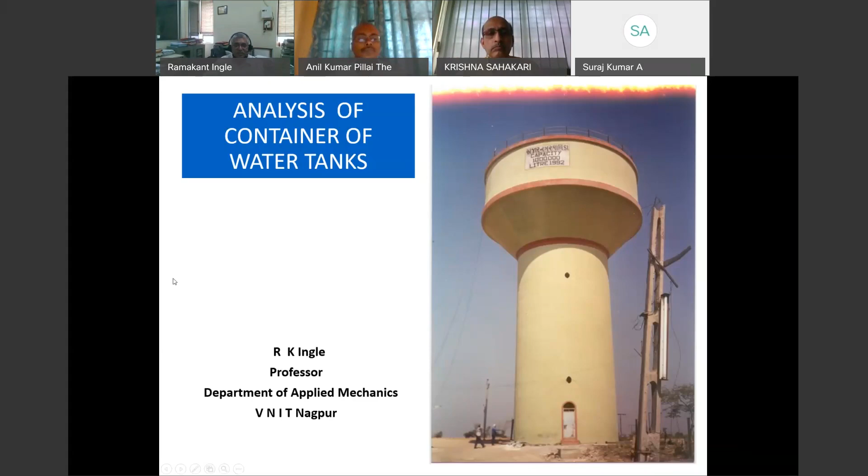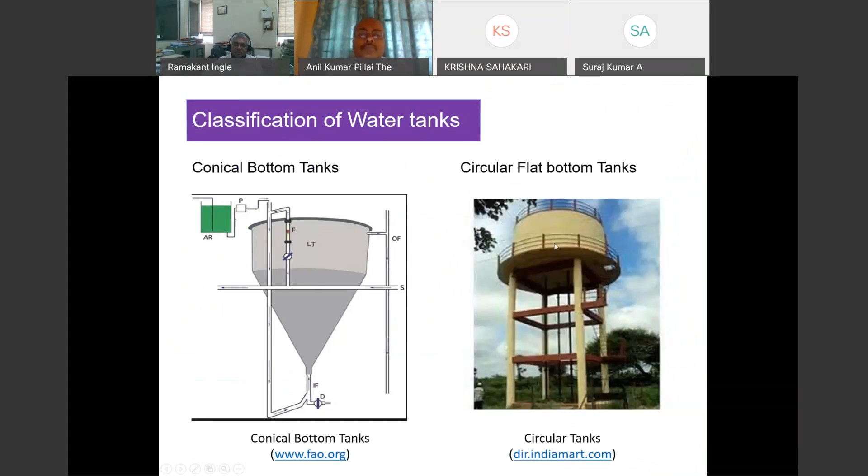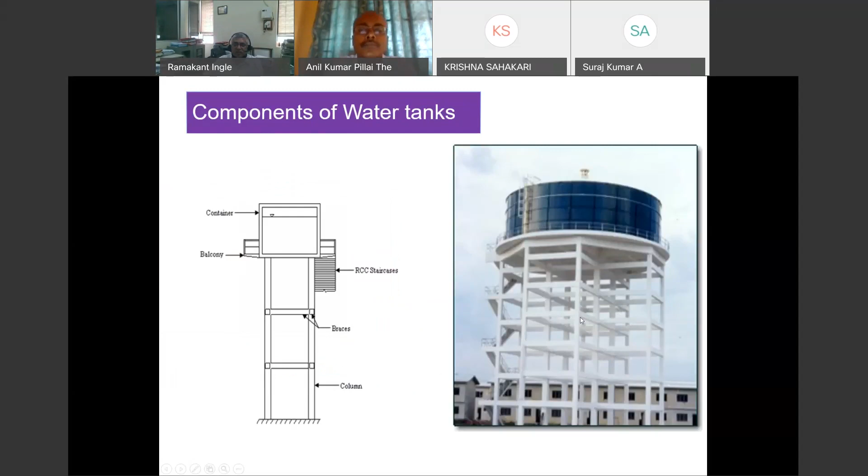First of all, analysis of container. We can have many types of container, like circular, which is underground, which is overhead. Then we can have rectangular, spherical bottom tanks. We can have conical tanks. We can have flat circular tanks. In Maharashtra, such type of tanks are very popular. And Intz tanks, which are quite popular especially in North India. In Maharashtra these are not very popular because their staging cost itself will be much higher compared to the other cost. These are the tanks which are popular in India, in Maharashtra. It is basically columns and braces. I will be discussing analysis of this tomorrow.

Basically, liquid retaining tanks can be underground, on ground or elevated. Based on shape, they can be either rectangular, spherical bottom, conical bottom, circular tanks, Intz tanks. And based on material, water tanks can be of steel, they can be nowadays ready-made, then reinforced concrete and composite tanks. Composite means the staging will be of concrete, and then a ready-made tank is placed at the top of it, which is also quite popular nowadays in villages.

Now, method of analysis. Basically, these are the 4 methods which are commonly used in analysis of container of water tanks. One is membrane analysis, continuity analysis, then IS code method. IS code has given some coefficients, and if we use those coefficients with certain boundary conditions, that I am calling the IS code method. And then more general is finite element method.

Tomorrow, day after tomorrow, Dr. Virendra Dehadra will be discussing, we have developed one frame analysis method for water tanks, which is just equivalent to finite element method and which is much faster. I recommend most of the time that particular method for water tanks. I will be discussing all this one step by step.

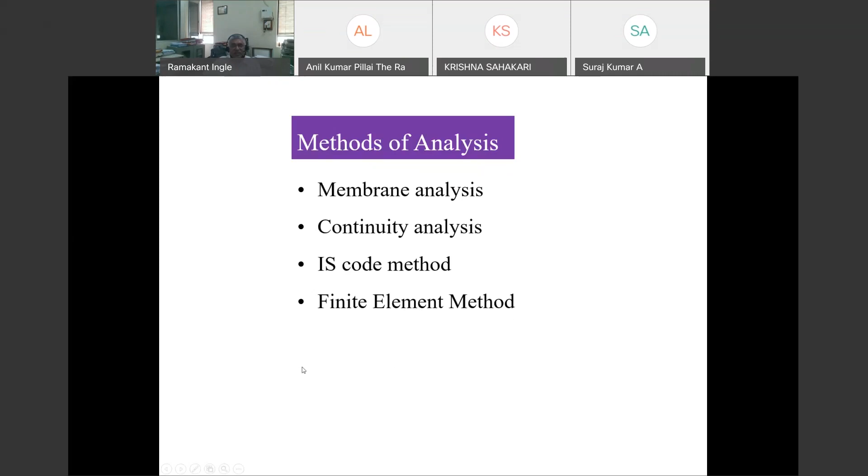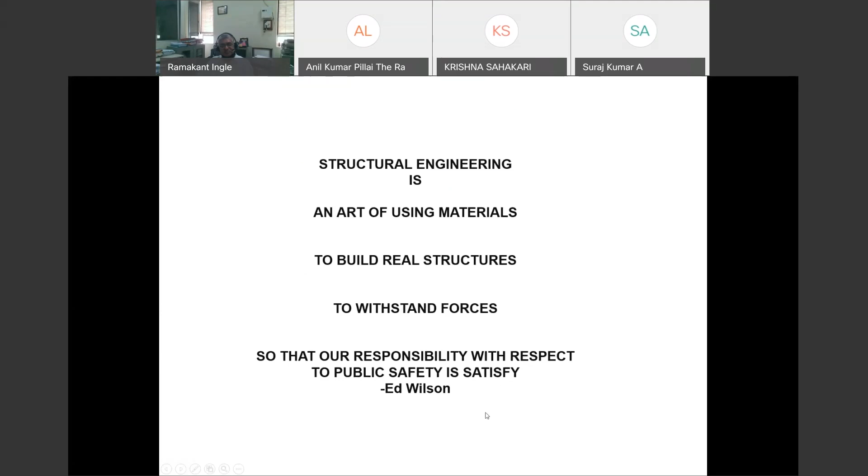This is one statement which I liked. I have taken this from Dr. E.L. Wilson's book, the author of SAP 2000. What he mentioned: structural engineering is an art of using materials to build real structures to withstand forces so that our responsibility with respect to public safety is satisfied. Now you can see the hidden things in this - an art of using materials that have properties which can only be estimated.

To build a real structure that can only be approximately analyzed. Apart from simple structures like a cantilever or simply supported beam, we cannot solve any structure exactly. Whatever software you are using, none of the structures can be solved exactly. It is only approximate with certain assumptions, like I was talking about grade of concrete. We cannot have the same grade of concrete for all the elements of an ESR, but still we are assuming it is only one and we are going with that analysis.

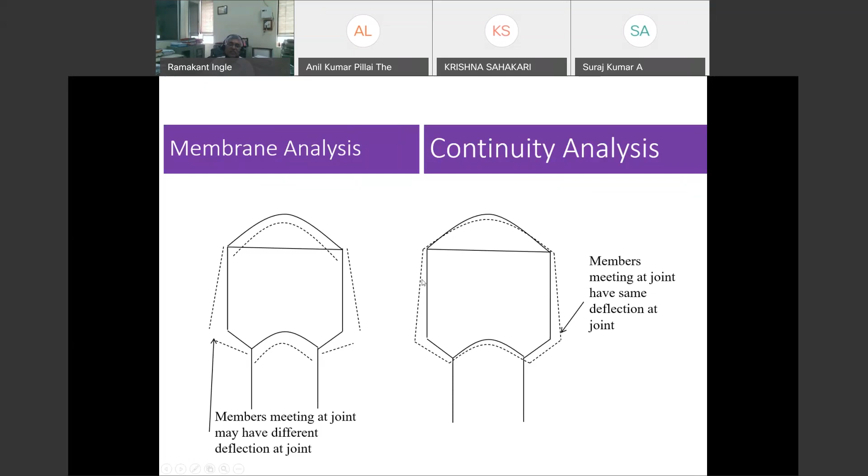We can solve this particular problem of a container by simply assuming a container wall which deforms like this, A to C.

This total displacement will be WH R square by ET. Suppose there is no connection at this point.

Now to have connection at this point, we can bring this particular point here. We can write a differential equation for this particular structure.

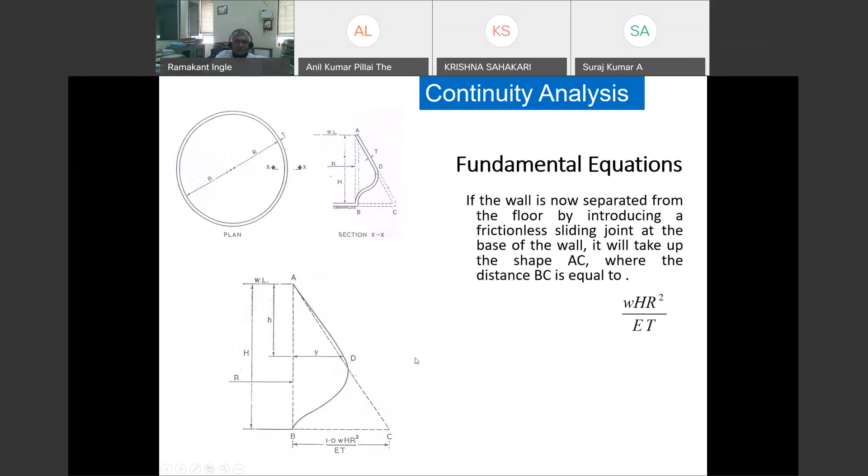Once we calculate the A, B, C, D constants, we can get all the values: deflection, slope, moment, and shear at any point H from the top.

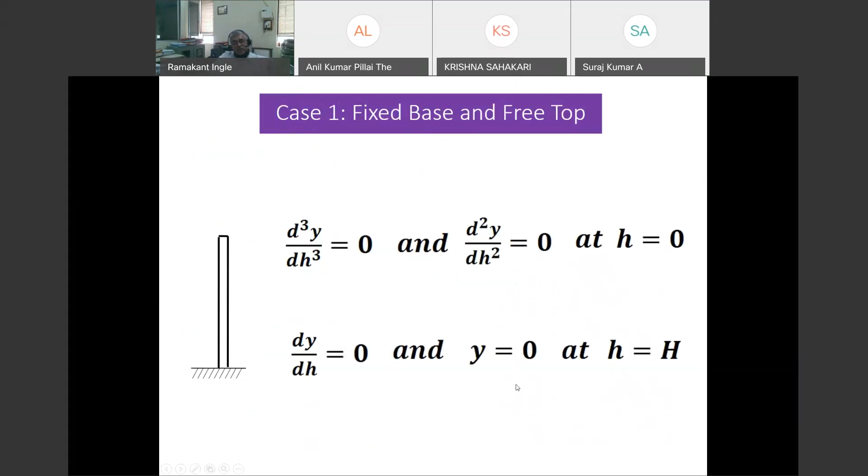Now this A, B, C, D calculation is based on boundary conditions like fixed base, free at the top. We can apply these boundary conditions and solve for A and B, and we get the hoop solution like this.

This is our hoop solution. You can see it has been cross-checked with so many software as well as IS 3370, because this is a standard case: fixed at the bottom, free at the top.

Again, I would like to mention that whatever tables are given in IS 3370, these are exactly same as given.

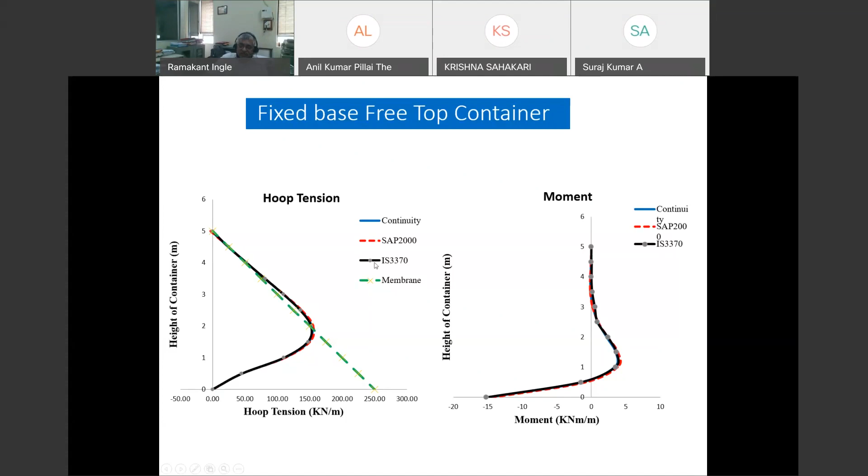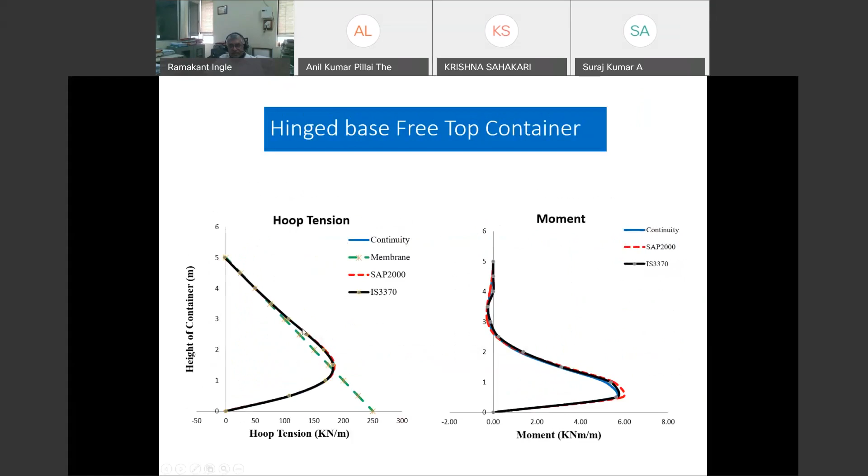Once we have got that differential equation, we can solve for hinge base, free at the top. You can see these are the moment diagrams. This is hoop tension and moment diagram for that. Now I will be just browsing through many cases.

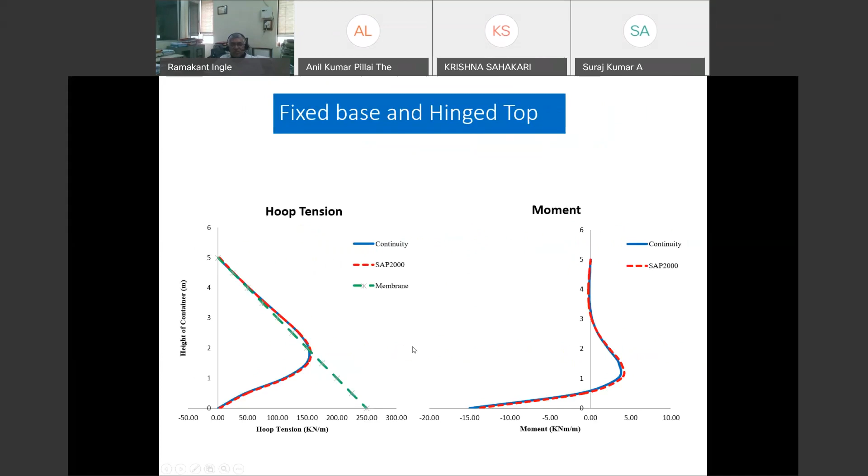There are many cases which are not given in IS 3370, but we try to solve them. Fix at the base, hinge at the top. This is the hoop tension, and this is the moment diagram for that.

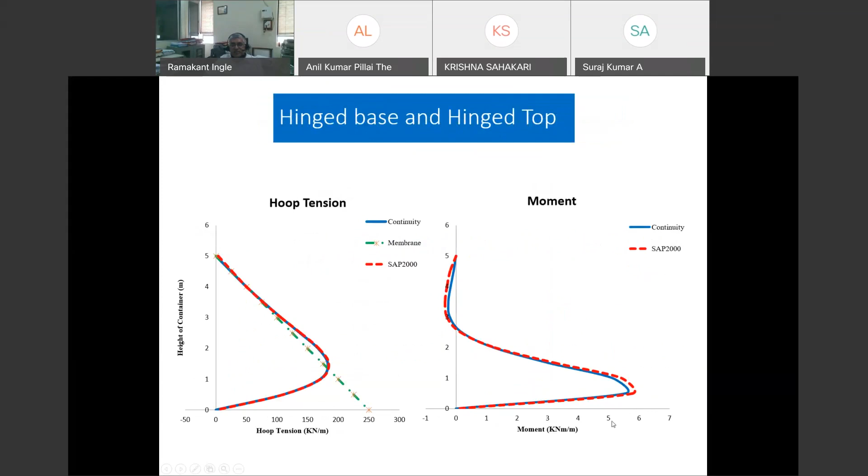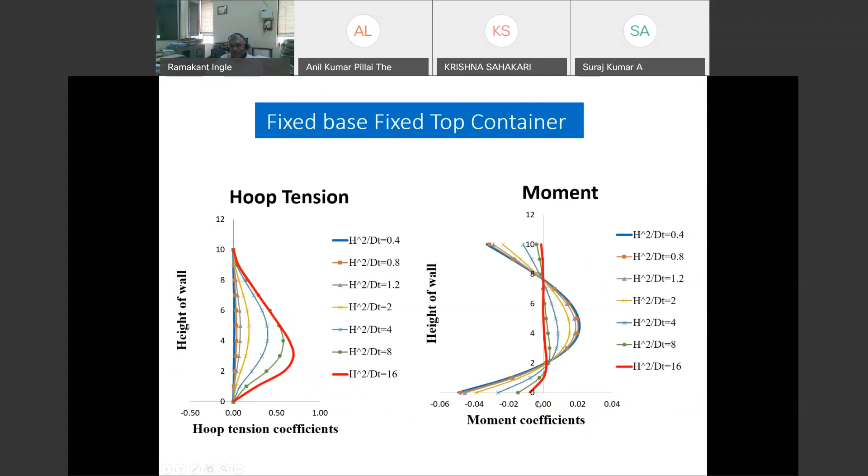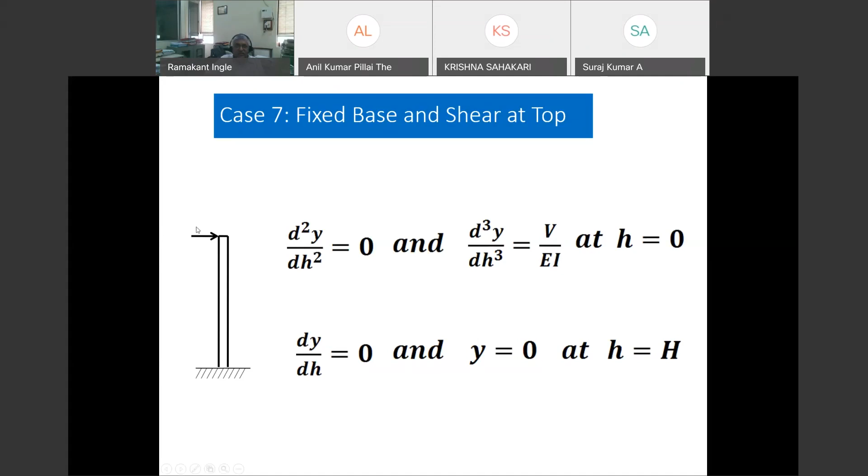Now why shear at the top? You can see we are having slab at the top. Most of the times what happens, this slab is either resting on this particular wall or it is attached to the wall. Now, because of temperature, there will be contraction and expansion of this particular slab, which may induce horizontal shear at that particular point. So this case is for that particular condition. You can see we get moment at the top.

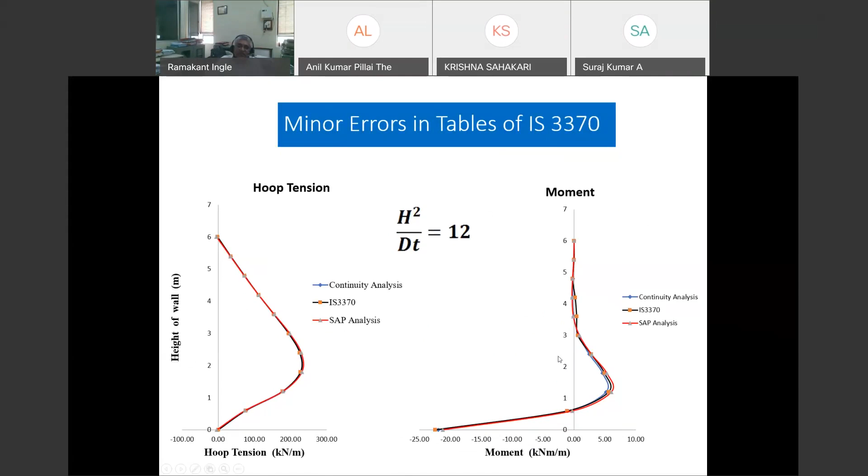Now, I would like to mention here, why so many cases? Fix at the bottom, hinge at the top; fix at the top, hinge at the bottom; free at the top. See what happened, we are having this particular slab. Now, before going to explain this methodology, I would like to discuss.

Let's take a simple plane frame, two columns and a beam connecting at the top, fix at the bottom. Can we take that particular beam as fixed in between columns? No, because it depends on the stiffness of columns. Now, as we increase the stiffness of the column, let's make columns very big. You will find that the beam starts behaving like it's fixed between the columns. If you try to have slender columns, you will see that our moment approaches WL square by 8, which is the simply supported case.

Same thing happens here also. Ideally, I would like to say that fix at the bottom is a very approximate boundary condition. Now you can see many times what happens, we have got 200 wall thickness and we have got 200 slab thickness. We cannot say that this 200 slab thickness, resting on soil, will give complete fixity to this particular wall. So it will not be exactly fixed at the bottom. Even at the top also, most of the times our top reinforcement goes into the slab, so it cannot be free at the top.

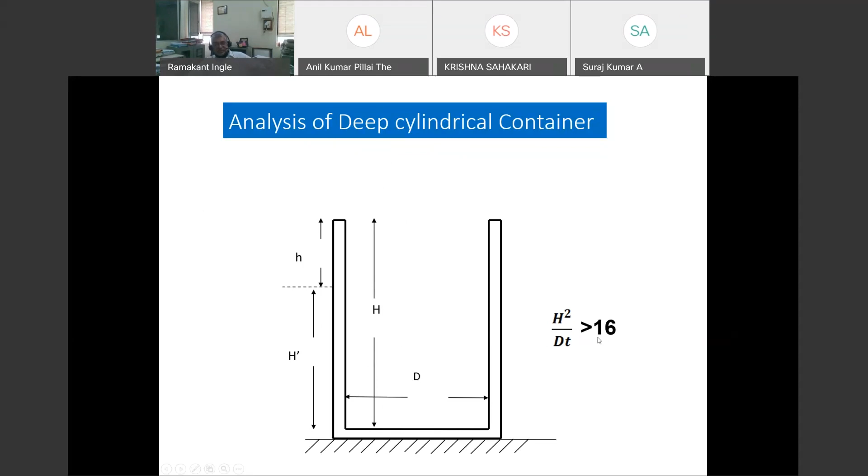Now, coming to deep cylinders, what happens? Our H square by Dt ratio is given up to 16. So we can calculate, based on that H square by Dt ratio, the H here. Now, the above part we can design as a membrane, and the below part we can design considering the H square by Dt ratio coefficients given for H square by Dt ratio of 16. And we can solve the deep cylinders also.

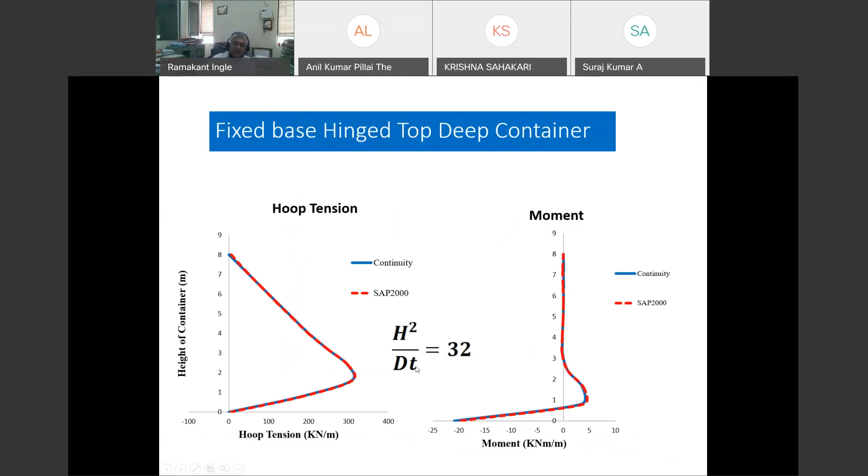Or we have given in our booklet H square by Dt ratio values of 32, 64, 40, so many values, and these values are also available in the PCA handbook, which can be referred.

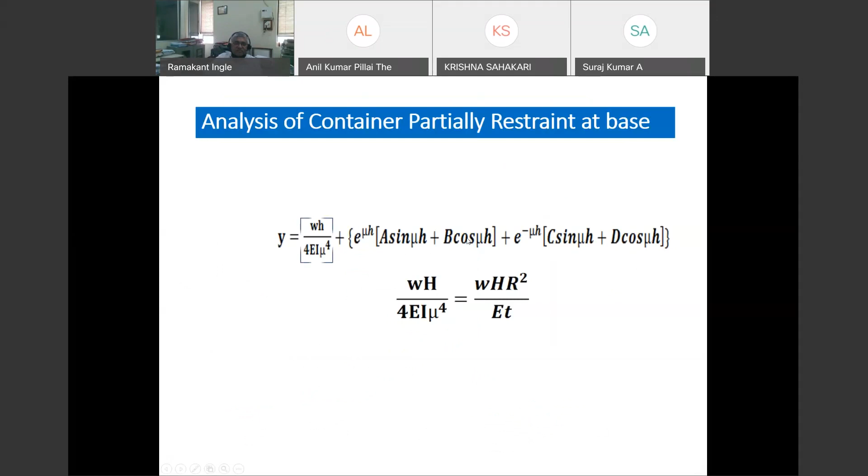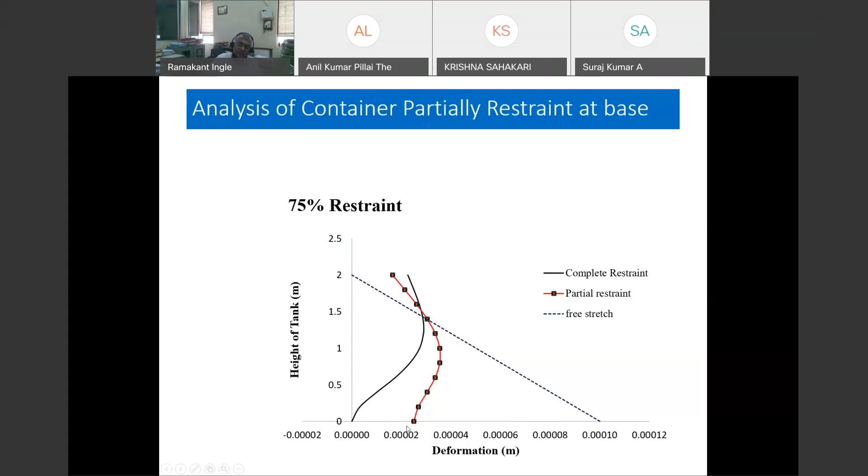Now what happens because of that? There will be a change in hoop tension. You can see our hoop tension changes. You can see this is our hoop tension.

Most of the times what happens, many designers put hoop tension still at this particular location, bottom some part and top some part, given as almost minimum hoop tension. Now you can see, suppose there is a partial restraint at the bottom, our hoop tension increases at the bottom. Even moment also, there will be variation in moment. So we have to keep in mind all these factors while using any ready-made table for design of a container.

Okay, we can see how our moment and hoop tension diagram varies based on the restraint provided. If we are providing, let's say 150 or 200 thick wall, we cannot guarantee that it will behave like a fixed support, there will be some release in restraint. So while designing, we should keep all these points in mind.

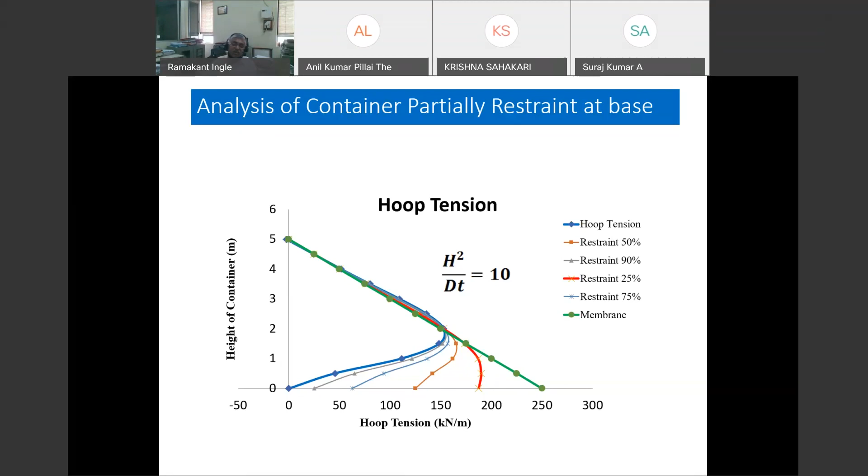You can see how moment also varies based on the restraint. Now this is again restraint at the bottom. This is restraint at the top and bottom. This is restraint at the bottom only, and this is free. This is for H by root TR is equal to 2.

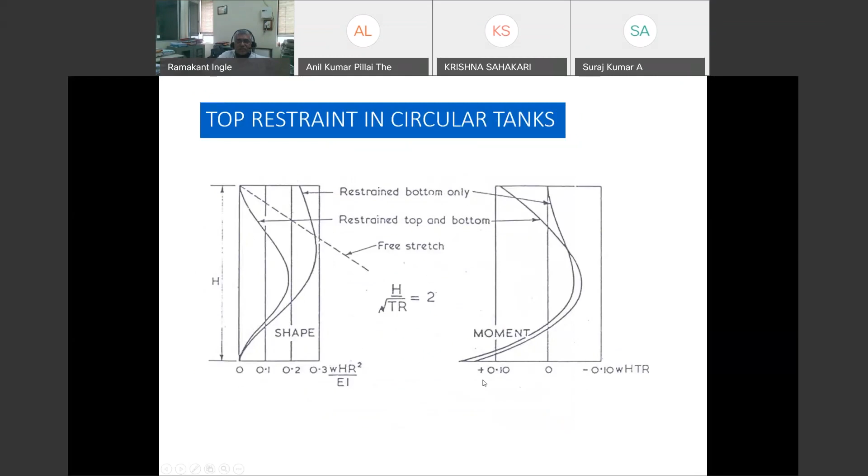Then this is again one more graph. Restraint at top as well as the bottom, and restraint at bottom only. This is just to explain how it varies. There will be considerable difference based on the restraint.

Now you can see here restraint at the top and bottom. If we want to have restraint at the top also, we have to provide proper reinforcement at the top also. This will give our full fixity at the top also, like at the bottom.

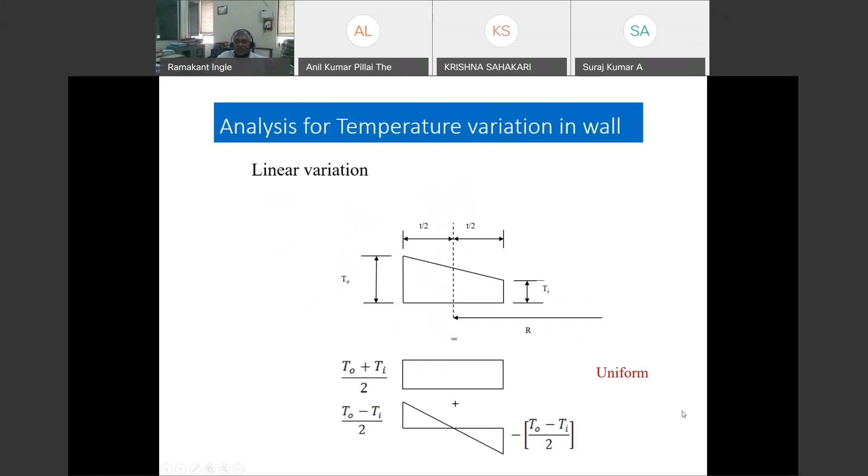Now, day before yesterday, Dr. Jain was talking about temperature variation. Even we can take temperature variation also. I have not seen any designer considering temperature variation, but it matters a lot. We can have uniform temperature as well as gradient.

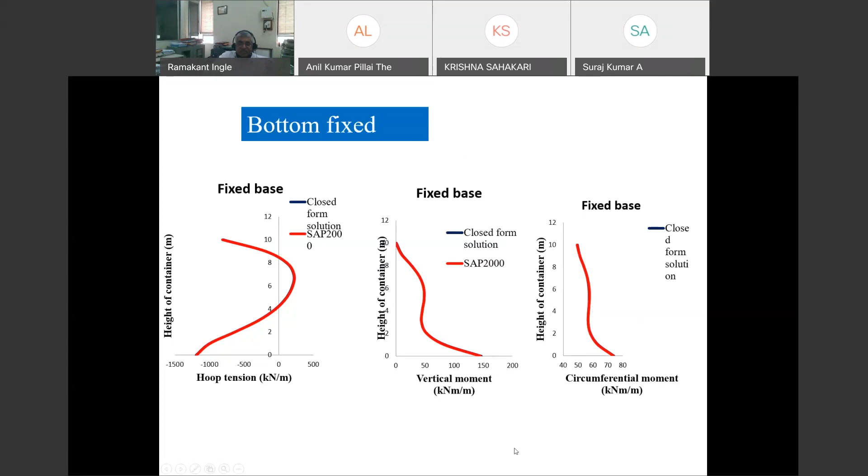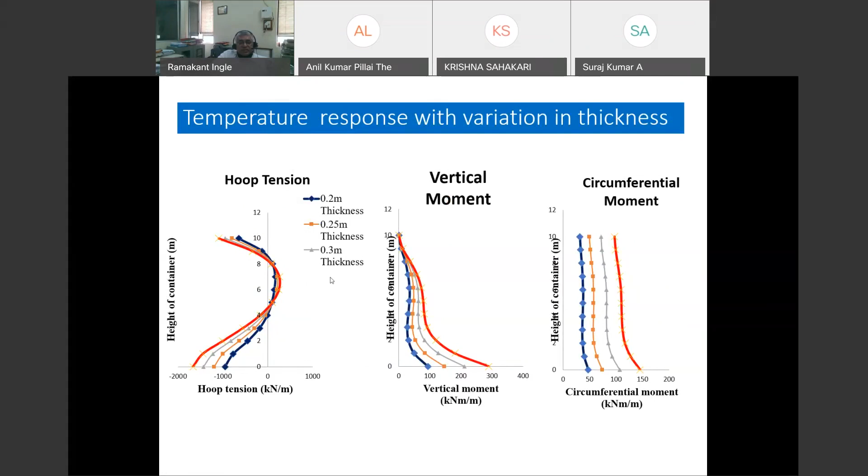Now this is our temperature variations due to thickness. More the thickness, more will be the response. You can see here.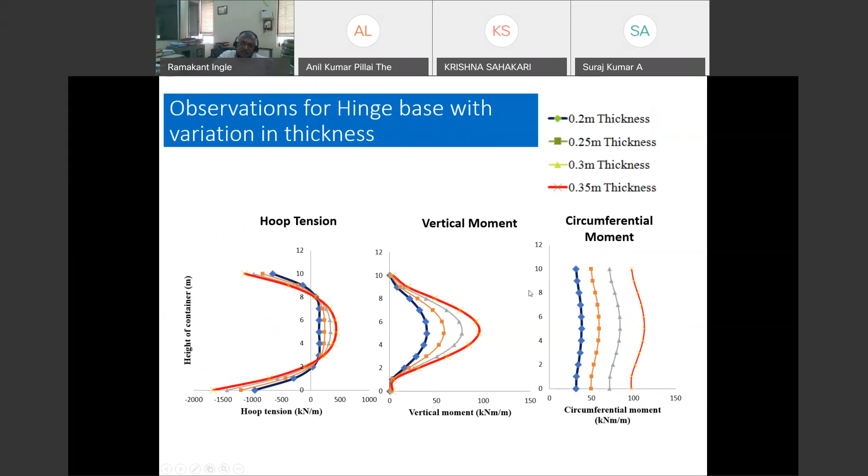Effect of diameter is not that seen considerably as compared to the variation in thickness. You can see here variation in thickness is much higher compared to variation in diameter of the tank, because of temperature.

This, it depends on boundary condition. Now this is hinge at the base. You can see here, your diameter change. Variation in temperature is considerable here in vertical moment.

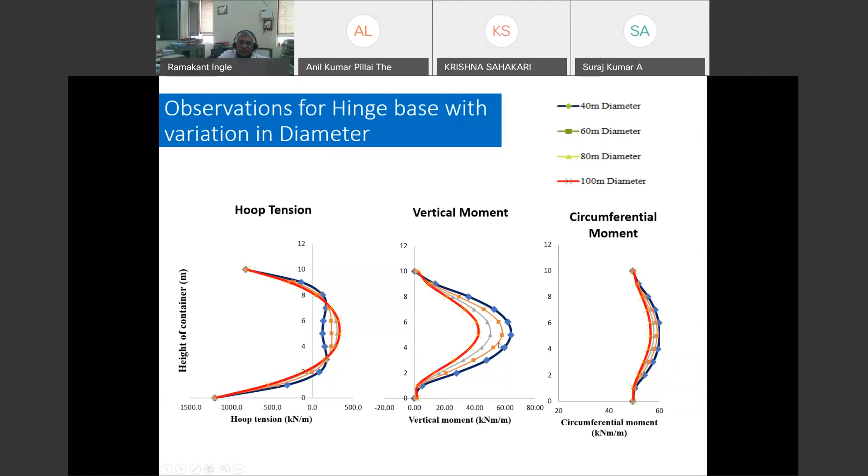Most of the times what happens, we are varying our thickness more at the bottom and top. We are reducing to whatever minimum requirement. There are no graphs given in IS 3370 or charts, or no methodology is given for variable thickness.

Now you can see this is also approximate. It is a thickness T at the bottom and 0 at the top. This particular is just to explain there is a variation between uniform thickness assumption and variable thickness. You can see here our value of hoop tension varies here depending on h square by dt ratio.

So we cannot say that, okay, take average thickness or take more thickness or take less thickness to find approximately the hoop tension or moment. That's why I'm coming back to that Dr. Wilson's slide. All our analysis is very, very approximate, and we have to pay penalty for that while placing the reinforcement. We have to be literally somehow liberal while providing the reinforcement, while providing the thickness. It is not that we can say that it is exactly provide only that much.

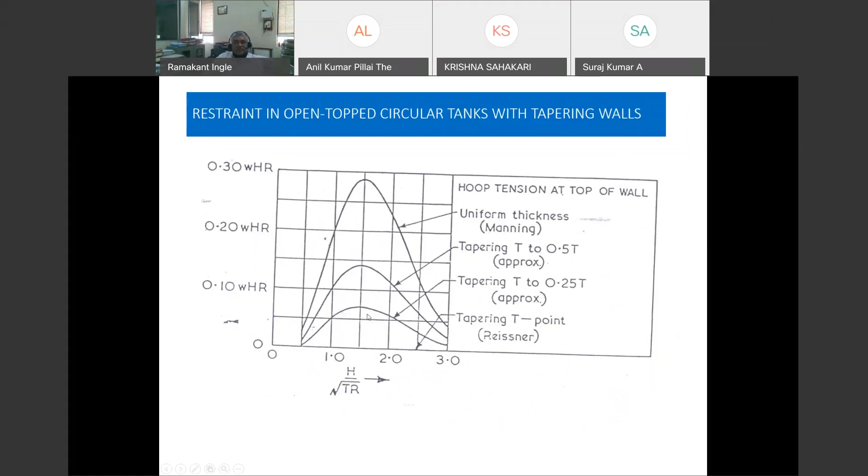So all this point we have to keep in mind. You can see the variation, how it varies. Tapering walls. You can see the variation in tapering walls. This is hoop tension at the top of wall.

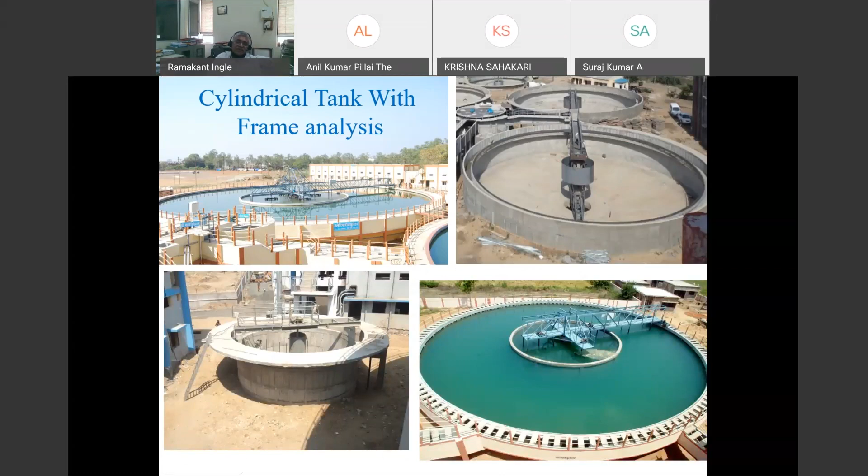Now this method of frame analysis which we have derived, it is based on the tank owing to circular nature. Its deformation we can relate with the similar analogy of soil structure interaction. This particular wall, we can say that it is resting on soil. Like this 1 meter length, circumferential length of wall we can take. This is our thickness. This particular thickness is thickness of this our launder or this cantilever slab, or it can be passage at the top.

You can see our moment as well as hoop tension varies based on this. These are the springs which are based on radius of this tank as well as thickness and E value of this particular concrete. You can see the FEM analysis as well as frame analysis results, they are quite matching exactly. This particular variation in moment is because of that launder slab at the base, which changes the moment diagram.

Now we don't have any chart, and we don't get any exact results unless we go for FEM. FEM is quite an involved procedure. We need good software for that and good experience also.

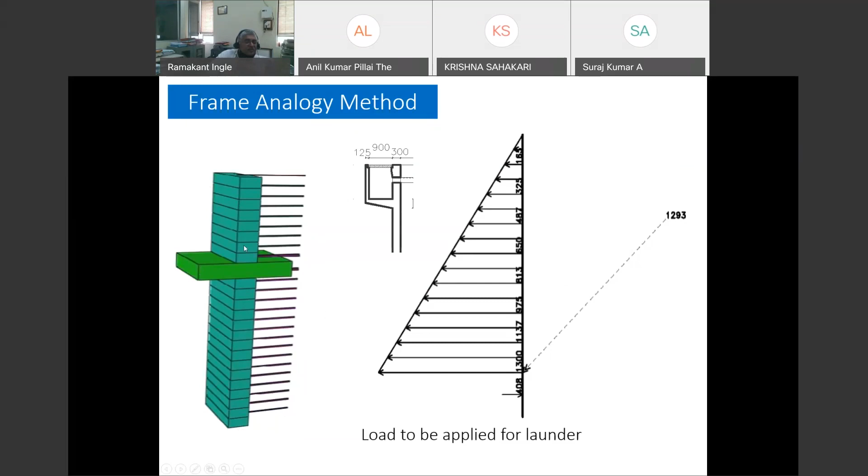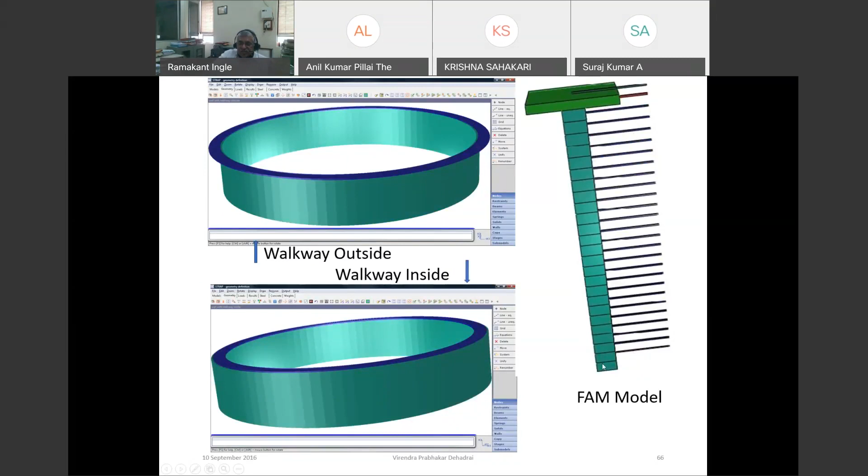And apply water pressure on this. Even we can have moment because of this particular slab also, and we can perform exact analysis using this analogy of beam on elastic foundation. You can see here top slab, these are the springs, this is the thickness of wall, and we can have our results ready.

It is just like a plane frame. We get moment, we get shear force, even we can get deflections also. See, nowhere we get deflection in our water tanks, there are no tables available. So here in frame analysis we can even get that also.

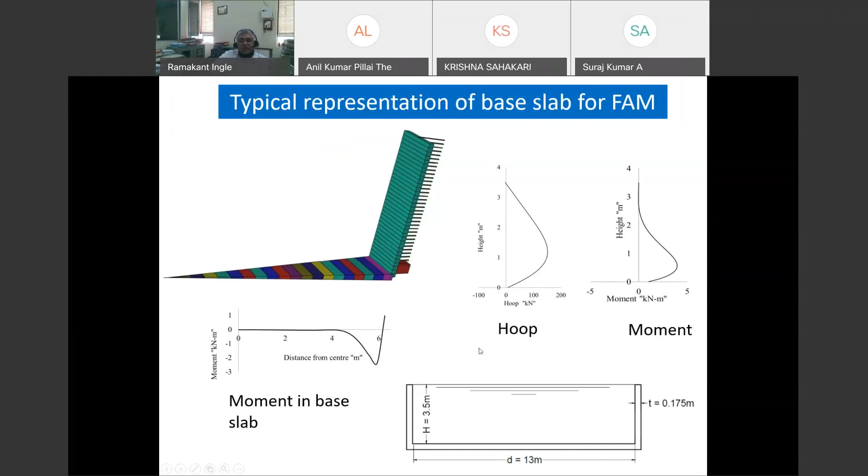You can see here, even we have done this for circular water tanks resting on soil. This soil can be hard, medium, or soft, and this is a water tank. We can solve using frame analogy method. This is the method which we have already solved, and we have cross-checked it with FEM. Again this is for h square by dt ratio 5.4 with TOW.

We have seen one advantage with TOW. There are certain advantages by going for extension of the TOW.

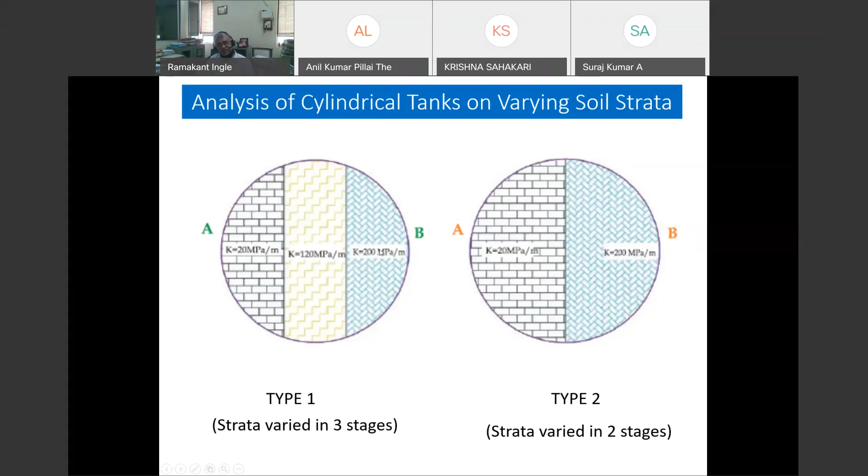Most of the times what happens, we try to use our IS 3370 coefficient tables to solve big water tanks also. Now in majority of water tanks, soil may not be exactly the same. Let's see here, soil is medium, soil is soft here, medium here, and hard here. And here soil is soft and medium. Our results will be different. We will not get the same results as axisymmetric structures, but there will be different results.

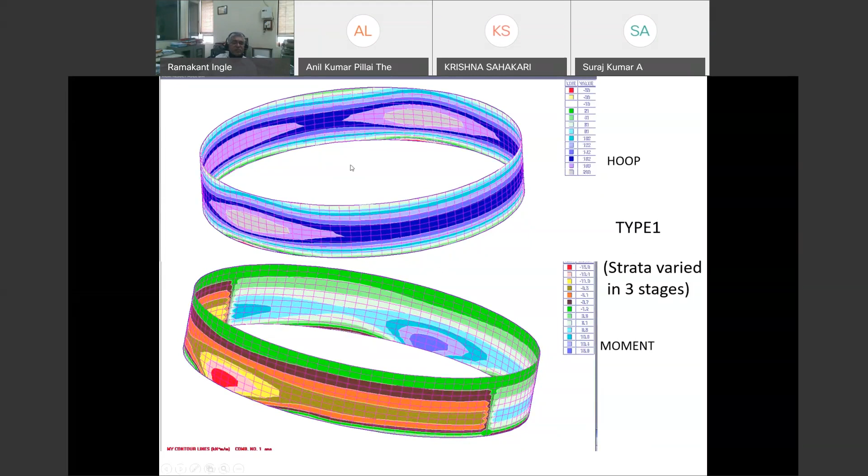So we have to give consideration to that also whenever we try to analyze bigger water tanks, big diameter water tanks, and all this can be very easily taken in frame analogy methods. Now I have discussed about circular water tanks. Now I would like to go for rectangular water tanks.

Again, rectangular water tanks, we have got an approximate method. There are many books which give some approximate formulas. Even we have got IS code also, given coefficients. We can use finite element method, we can use finite difference method also.

This is a tank. Now you can see IS method, it gives this particular wall with certain boundary conditions, and it gives for standard also some water tanks like this. In majority of cases, we have to do certain corrections at the boundary because our particular shape may not be the same as this particular wall, so we have to do certain corrections at this particular point.

Again, it is our assumption whether to take fix at the bottom or hinge at the bottom, or there will be restraint, partial restraint. It is a million dollar question, and only the designer has to design it properly with a certain more factor of safety, because it is very difficult to say whether it is fixed at this particular point or hinged at this particular point.

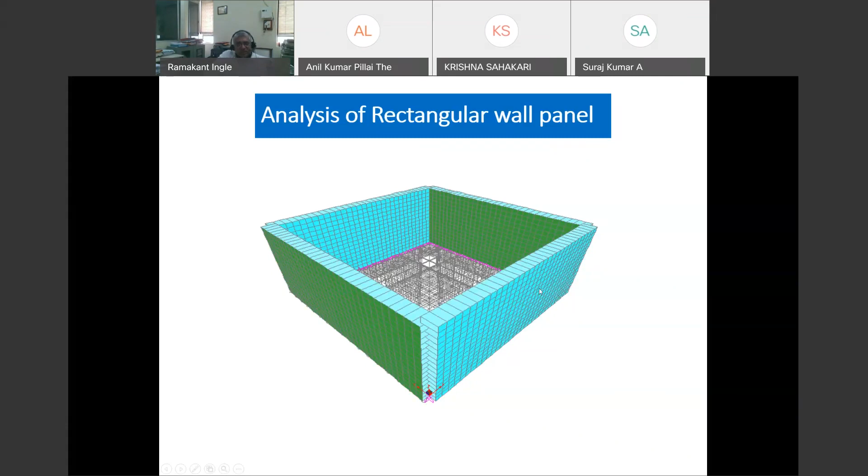So certain types of assumptions designers have to devise while using tables from IS 3370. So here also same thing is there, because such tables are given in IS 3370, even some other books also. At few points, moments are given, Mx as well as My.

Our study indicates that most of the times we get torsional moment also. We are designing only for Mx and My, that is vertical moment and horizontal moments, but at certain points there will be torsional moments also, which we get from FEM, but we are ignoring that. So even standard conditions are met, our results will be approximate.

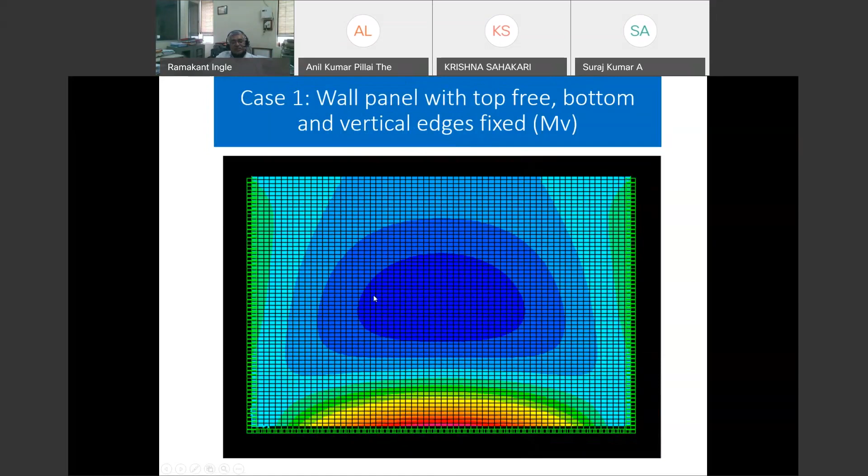You can see this is the FEM results which shows the vertical moment diagram. It is free at the top, edges fixed and bottom also fixed. It is subjected to water pressure, so this is the moment diagram.

Then top and bottom hinge, we have got different conditions for this - top and bottom hinge, and so on. These are a few observations. IS 3370 gives design table, but it doesn't give exact value of maximum moment. It doesn't give even deflections also, in case of rectangular water tanks. It will be approximate.

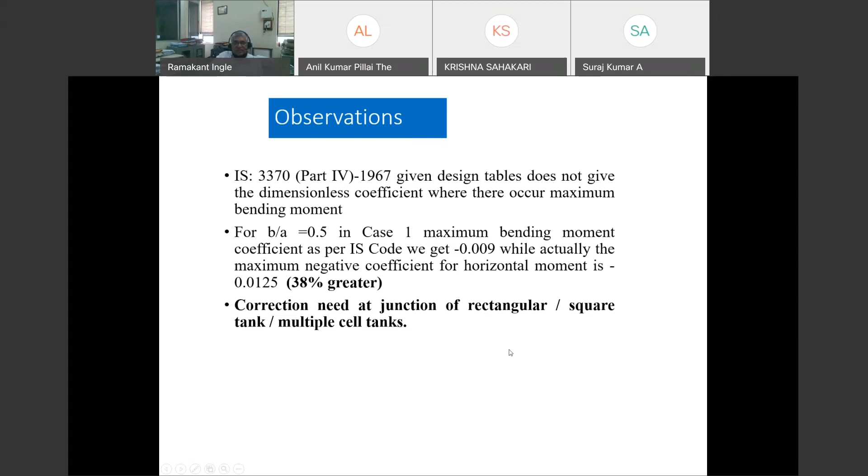Some corrections which I have already mentioned are required at junction of rectangular or square tanks, multiple tanks. We can use FEM for most rectangular tanks, and for circular water tanks, I suggest strongly we can go for frame analogy method, which is very, very simple. You have to just master it.

Any circular water tank with any boundary conditions, with any variation - it can be a trapezoidal water tank with thickness 200 at the top and maybe a different thickness at the bottom, or anywhere. You don't have any problem with that.

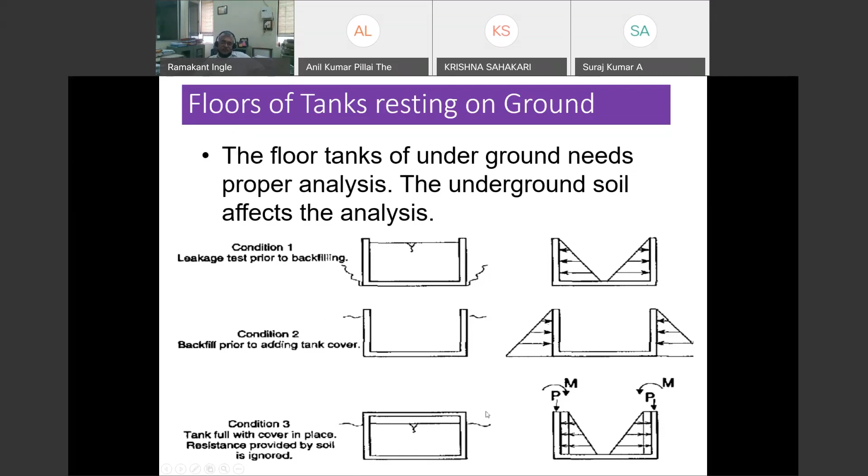These are some forces which we have to consider. Normally whenever a water tank is there, we have to consider without any soil from outside and with water inside, no water inside with soil outside, and no water inside with water table which can start lifting up the water tank. I have seen some water tanks lifted because of these conditions. So either they have to put concrete here or have dead storage permanently in the water tank to avoid flotation.

In case of earthquake, earthquake also causes some pressure on the walls - it is called hydrodynamic pressure. There will be suction on one side and pressure on the other. So we have to design for this, but we don't have any coefficient for such type of design - only FEM or frame analogy methods we can use for analysis.

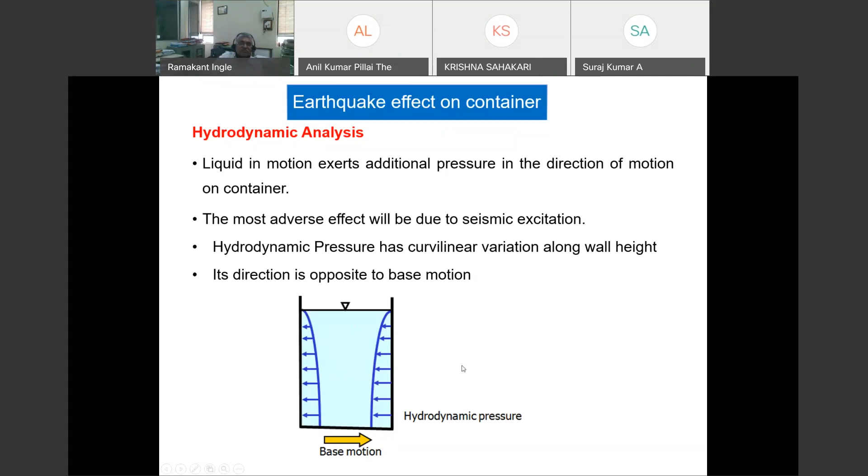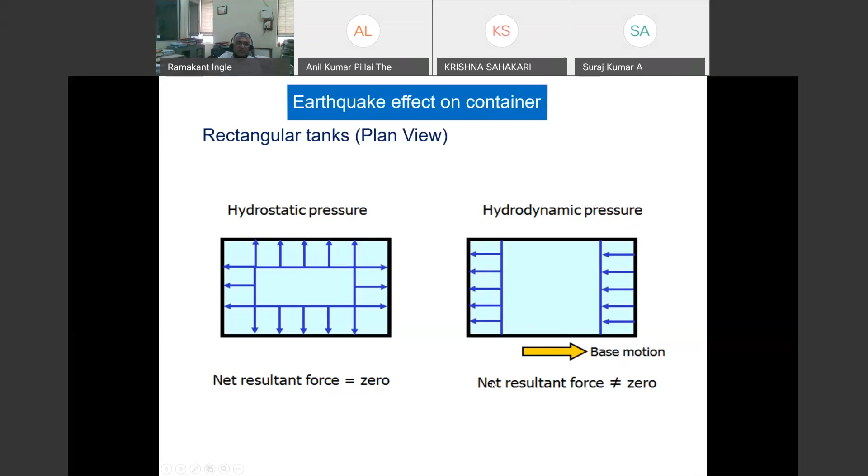You can see hydrostatic pressure is uniform throughout in rectangular water tanks, but hydrodynamic pressure will be something like this when earthquake is in this direction - there will be pressure on one side and suction on the other. We have to keep all these things in mind, as this may change the behavior of our forces.

Normally we have water tanks having roof at the top, and invariably we say, okay, provide only 300 mm freeboard. Now we have to consider, suppose our freeboard is 300 mm and there is an earthquake - this sloshing height, if it is more than 300, what will happen? It will hit the bottom of the roof slab.

Hitting the roof slab means applying vertically upward forces. Generally we design water tank roofs only for downward force, that is dead load and some live load. We never design our roof slab for upward forces. Now this may cause some under-design of roof slab.

So the best thing is, if we want to restrict to 300 mm freeboard, no problem, but we have to design our roof slab with 2 layers of steel at bottom as well as top, because that top layer of steel will be active when there is upward pressure because of sloshing effect. Or we can have our freeboard adjusted as per sloshing height, because IS 1893 part 2 on water tanks gives an expression for calculation of sloshing height also. So our freeboard can be increased according to that.

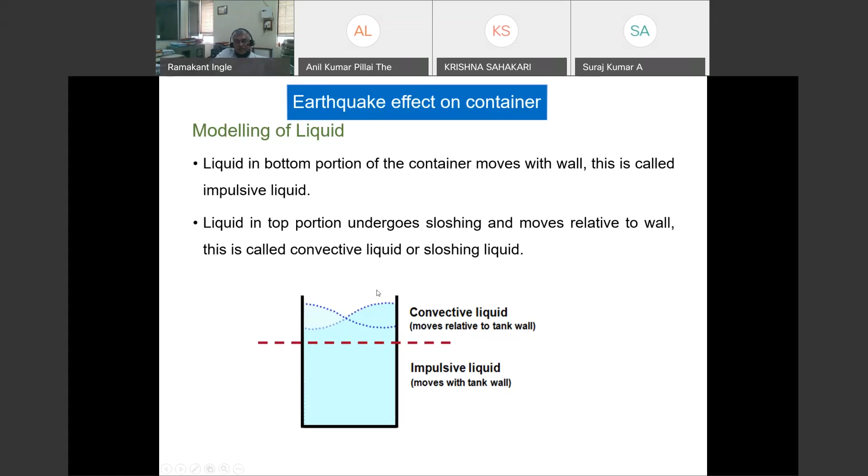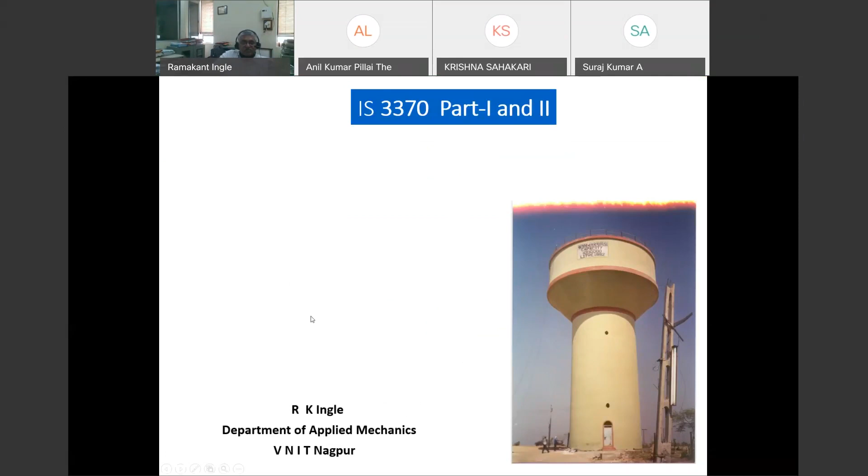Now this IS 3370 part 1 suggests concrete. It says that standard concrete is M25 to M55.

Even nowadays for buildings people are going for M45 grade concrete. I don't know why we as designers restrict ourselves to only M30 grade concrete, because it is minimum, it is not standard. Standard is what you decide. More the grade, more durable the concrete will be.

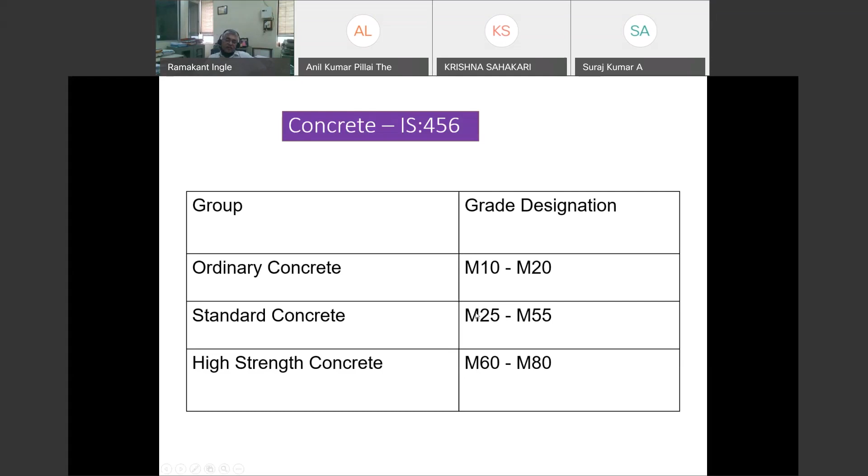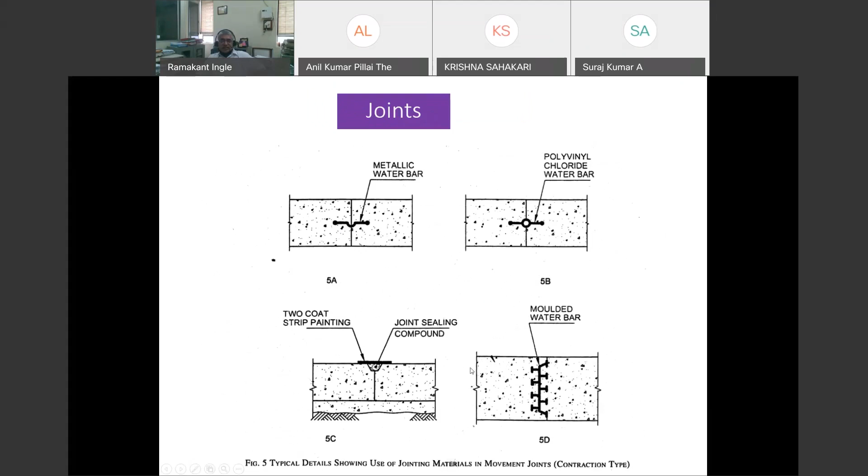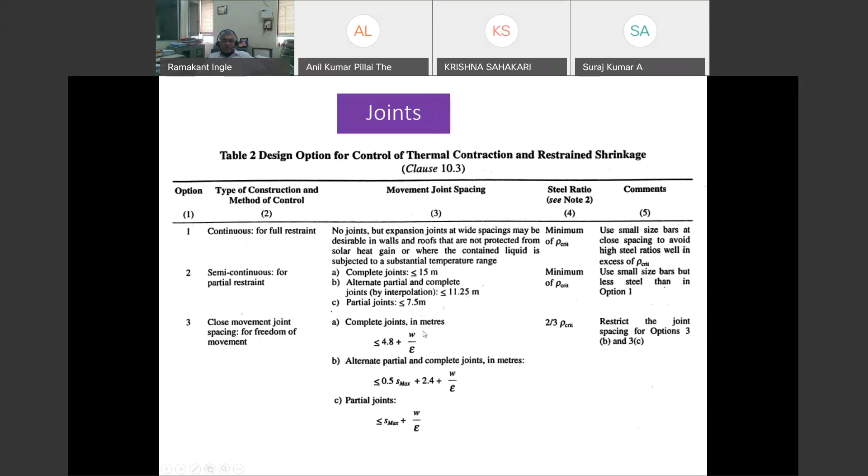Expansion joints, contraction joints - Dr. L.K. Jain has already spoken in detail on these joints. We can normally use this particular table to decide the spacing of joints. Here W is the crack width and this is the strain.

Most of the times we have to use water bars also. If our circumferential length is quite high, we even have to use expansion joints with water bars.

Now this is testing of structures. IS 3370 gives how to do testing of structure. It says fill the tanks, record the level after 7 days, record the level for the next 7 days at an interval of 24 hours. Total drop in 7 days shall be taken as indication of water tightness, and this shall not exceed 20 mm.

Then the roof slab also we have to flood with 25 mm deep water, and there should be no leak or damp patch below. Most of the time I suggest 2 layers of steel, even though roof slab may behave like a two-way slab. It is good designer practice to provide top as well as bottom steel in roof slab as well as bottom slab.

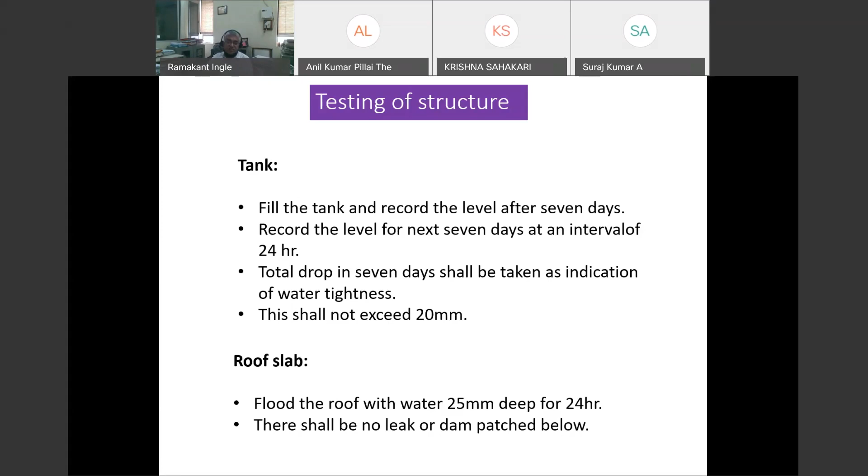Now coming to the design part of IS 3370 part 2. I'll be taking 15 minutes for this, then we can have a question and answer session.

Generally, IS code recommends limit state method. Even most other codes do. But our codes again say that we can still use working stress method also.

Here we have to check for cracking, and it should not exceed 0.2 mm. Some foreign codes suggest even 0.1 mm as minimum crack width. We have to keep in mind that reduction in crack width doesn't mean increase in thickness of wall or slab or increase in reinforcement.

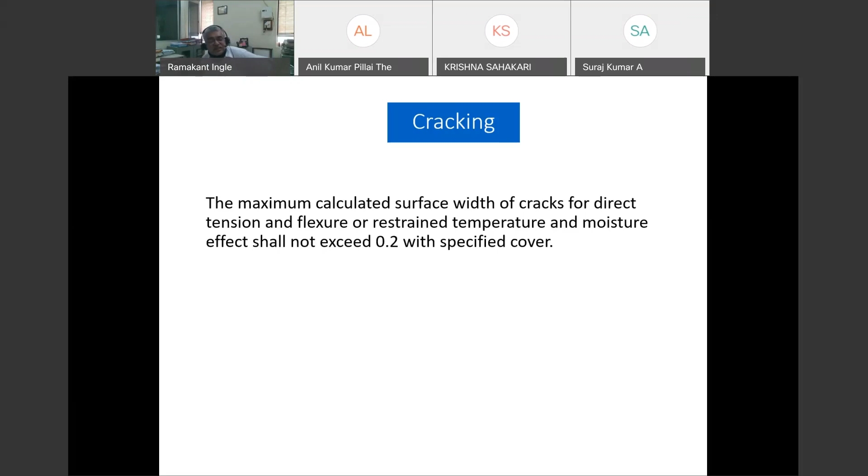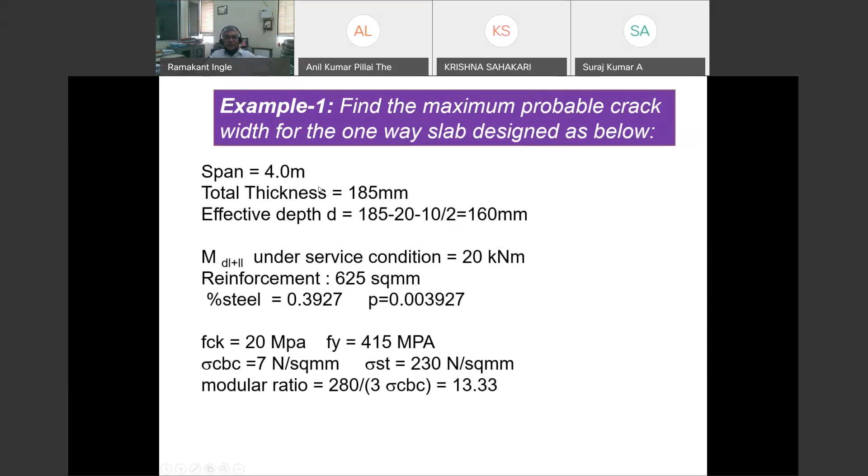We can always play with the diameter of bar and spacing. Now I will show you one example. This is a slab 4 meters, 185 thick. I can have 10 mm bar at 125 center to center, and my crack width will be 0.1026 mm.

I can have the same steel, but with smaller diameter, 8 mm, and you can see crack width becomes 0.07 mm. So it doesn't mean that we have to increase the diameter - this example shows the advantage of going for smaller diameter.

You can see, suppose for the same steel we want to provide 12 mm at 180 center to center - considering the same steel, our crack width increases.

Now, nowadays what happens at site: a designer has given 10 dia bar at 125 center to center, and the contractor doesn't have 10 dia bar, but he's having 12 dia bar. So many construction engineers allow this, because providing more steel - 12 dia at 125 - may increase cost, which may not be proper. So they allow 12 dia at 180 center to center instead.

So you can see what happens - by increasing the spacing along with increased diameter, our crack width will increase. So we should never allow at site to change the diameter of bar or spacing unless the designer is consulted.

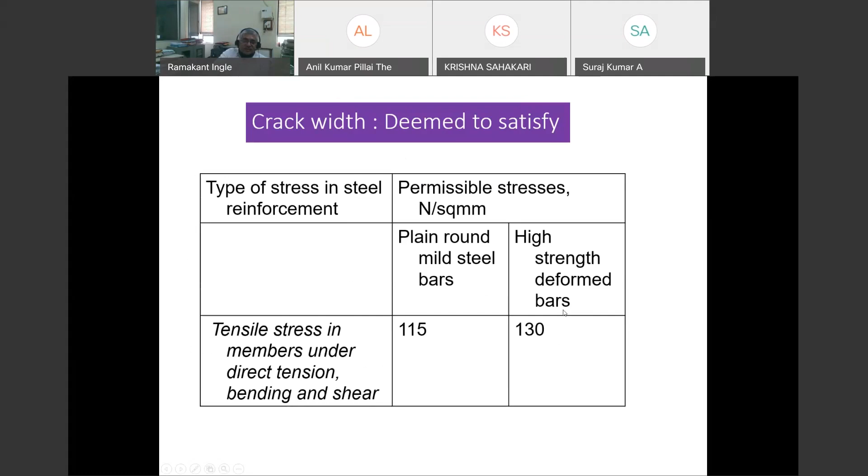Now, code suggests that if we use these particular stresses, crack width deems to be satisfied - that is 130. But this will give a very uneconomical design.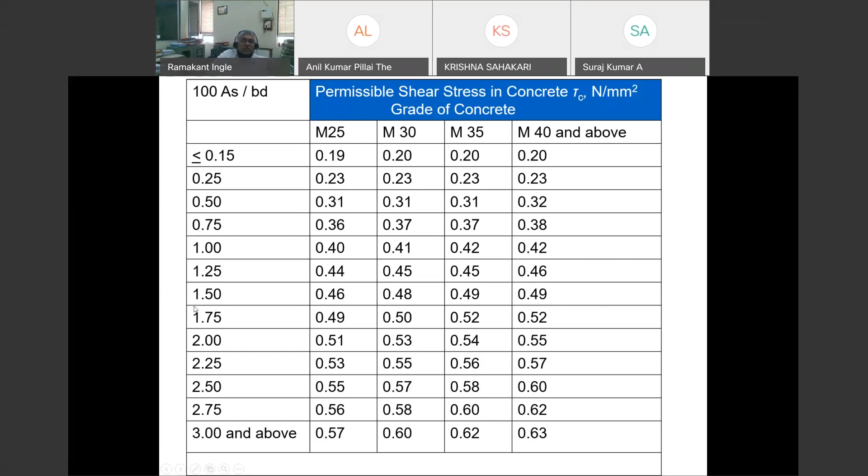When we do the design for limit state, it doesn't say you check only for flexure or shear or torsion. We have to check for strength. Strength means every member at any point should be checked for shear, flexure, and torsion. And for serviceability limit, it should be checked for deflection, crack widths, and even vibrations. There are so many checks, so we should not avoid the shear check also.

These are the permissible stresses in concrete.

The code suggests that no separate calculations are required for moisture or temperature changes if minimum steel is provided, provided all these particular conditions are met—provision of movement joint is also met, suitable sliding layer is also there at the tank, and so on. Otherwise, we can go for the annexure of IS 3370, which I will be explaining.

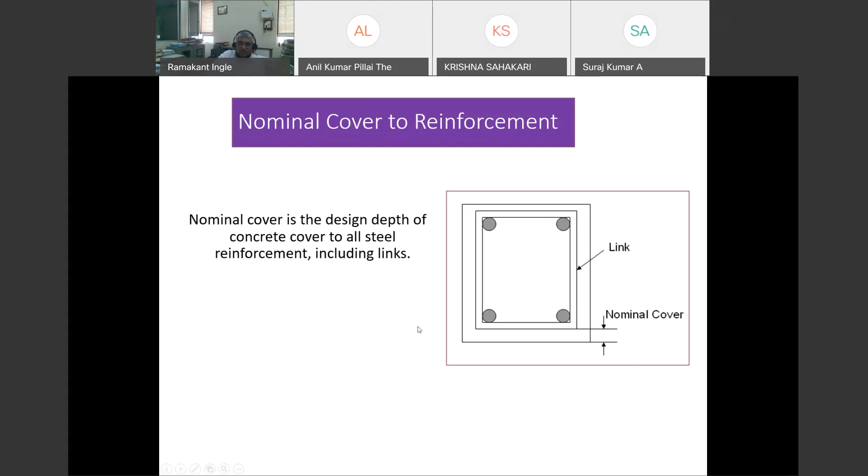Now, nominal cover to the reinforcement. Generally cover is given in case of column to the link. In case of slab, it is to the main steel. Now if it is a two-way slab, both steels are main steel, so we have to give minimum cover, nominal cover, to our lowermost steel. Now this is the table given by IS 456.

IS 3370 suggests that our condition for water tank is severe. We should use 45 mm cover. Most of the time I have seen people...

Hello. Some disturbances there. Hello, Suraj? Can you switch off your mic, sir? Dr. English sir, is it possible to switch off your mic? Mic, okay, I'll be doing it from my end, sir.

We have to see 45 mm. Tomorrow I'll be showing some slides with photographs of ESR, how because of cover we have to rectify, we have to remove, either rectify those water tanks or replace with a new one. So we have to keep in mind that our minimum cover has to be 45 mm.

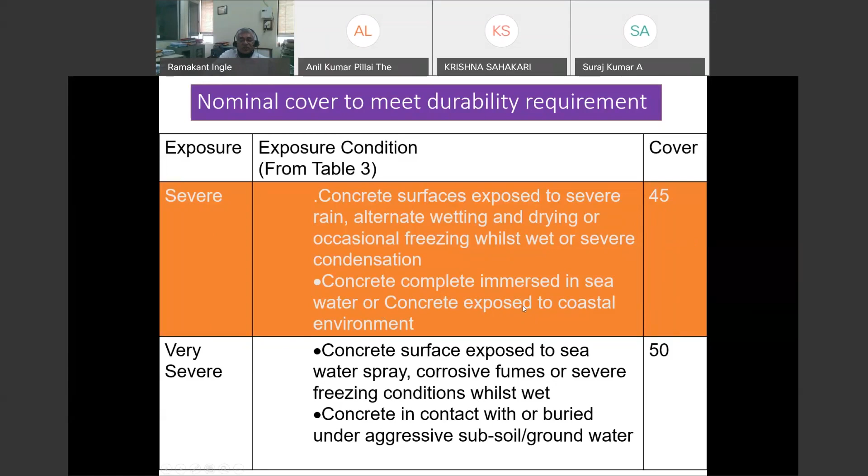What is the life of elevated service water tanks? In one of the discussions, people say they consider the life of the water distribution system as 30 years, so 30 years is the life of water tanks. I disagree with this—it can be a point of debate. My view is that our RCC structure should last more than 75 years. That 30 years life is for hydraulic design, not for structural design.

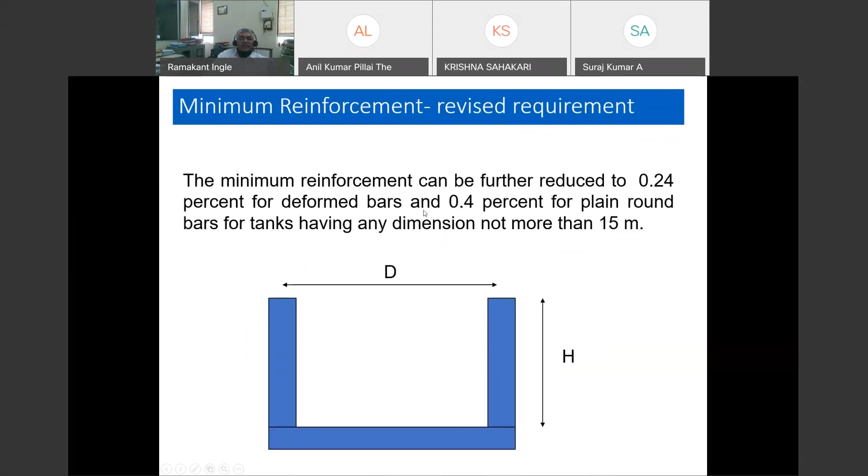Then again, the code suggests that if wall thickness is less than 200 mm, we can provide steel only at one face. If it is more than 200 mm, then only we should go for two layers. Generally what happens—I have seen designers, especially in water treatment plants, using thickness starting from 100 mm to 200 mm, and even in 100 mm, people are providing 2 layers of steel. I wonder how to place that 2 layer steel, at what spacing, and how to compact it, which compactor to be used—so many things are there. We have to keep in mind, even 200 mm is a little on the higher side.

I suggest even up to 175 mm thick, we should go only for a single layer of reinforcement. It doesn't matter that our effective depth will decrease; we can provide a little more steel, doesn't matter. If it is more than 175 mm, we can have 2 layers. Now, with 45 mm cover, we can still have more than 50 mm gap in between, so that we can put our vibrator and get good concrete done.

This is the minimum steel suggested by our IS code. If it is less than 200 mm, we provide it at the center.

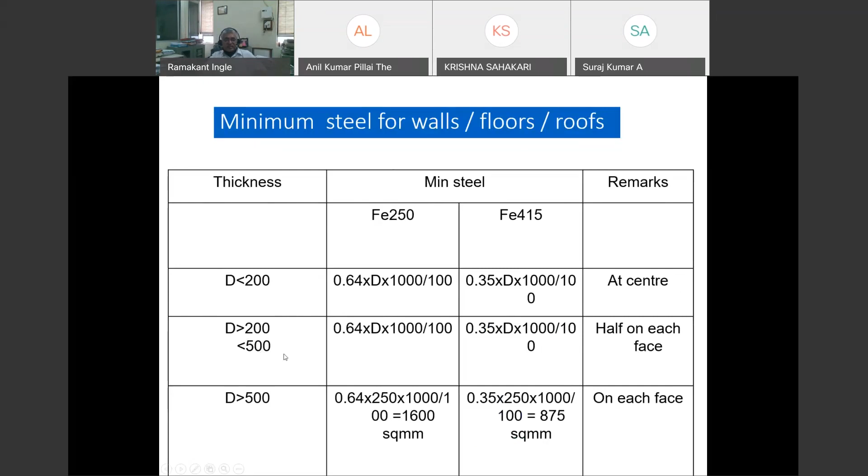If this is more than 200 mm, less than 500, I will try to show this with respect to a sketch. Yes, this is the ground slab. This is basically for the ground slab.

If it is less than 300 mm, we can have D by 2 minimum steel provided here. If it is 300 to 500, we can have steel provided at the top as well as bottom, depending on this thickness, D by 2 and 100 mm. If it is more than 500 mm, minimum steel calculated using 250 mm here and 100 mm here. This steel can be provided here as well as at this particular point.

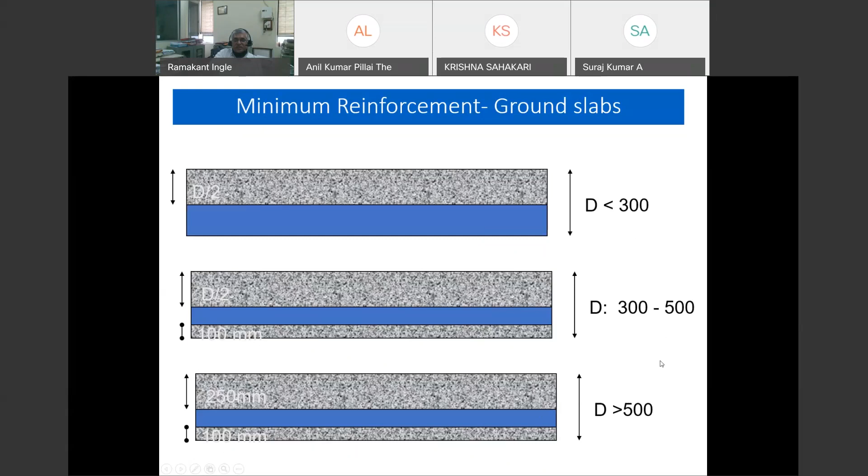Now I am coming to IS 3370, Annexure A. Crack width due to temperature and moisture. This is the minimum steel given by IS 3370, which is based on the FCT by FY ratio.

FCT depends on the grade of concrete. Suppose it is M25 grade concrete, our FCT is 1.15. If it is M30 grade concrete, it is 1.3. If it is M35 or M45, it will be different. Now, grade of steel - our minimum steel increases as we go for a higher grade of concrete, but if we are going for a higher grade of steel, it is reducing.

Then an expression is given for temperature and moisture also, T1 and T2. We can prepare - see, this particular chart we have already prepared. I will give the reference also for this.

Now based on diameter of bar, if it is 8 mm diameter bar, T1 plus T2, we can have these values, and this is the thickness of wall, or in case of ground supported slabs, the surface zone. Our steel we can select from this.

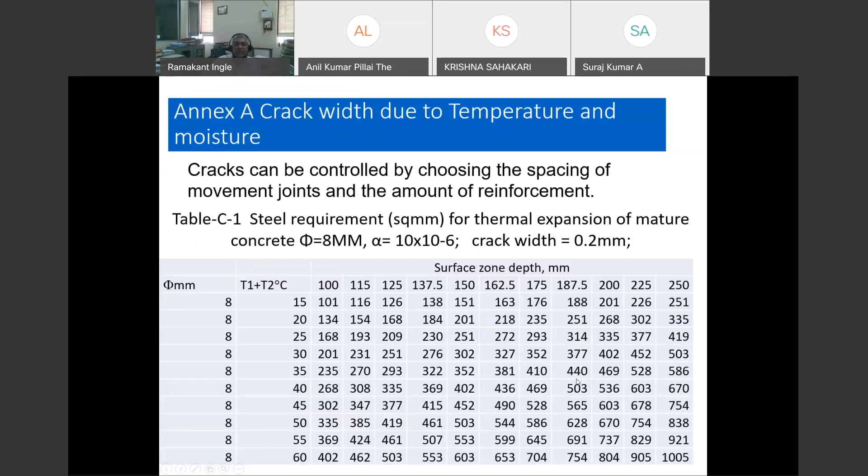So we can play - we can reduce the slab or wall thickness in limit state method, and we can play with reinforcement. Our reinforcement will be more than this required as per temperature, and it should be more than the minimum thickness required as per this. So these three things we have to remember: it should be more than this minimum requirement, more than temperature requirement, and more than serviceability conditions.

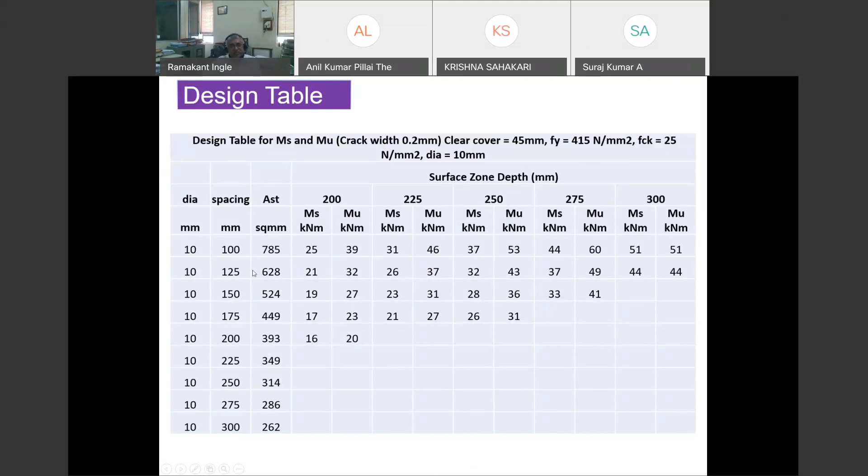Normally what happens is we calculate from analysis and get certain moments, MS. By applying a 1.5 factor, we get MU. We can cross check from this and directly get the reinforcement here. So this example of the table I have already explained.

Generally, what happens—our moment depends on, as I've shown in the analysis charts from IS 3370 as well as PCA, our moment as well as hoop tension depends on H square by DT ratio. Height of container is known, diameter of container is known, but T we have to assume.

Suppose we assume T as 200 mm. We do all the calculations, and suppose T is not sufficient—we have to go for 250 mm. Then we have to start back from the beginning, recalculate the moment, recalculate the hoop tension, and start doing the design again. So what we try to do is prepare a graph like this.

This graph depends on square root of H by R ratio and thickness. Since H is known and R is known, we can use these values. Let's say it comes somewhere here, 0.2. We say that thickness T of 200 will be enough. Now, how is it calculated?

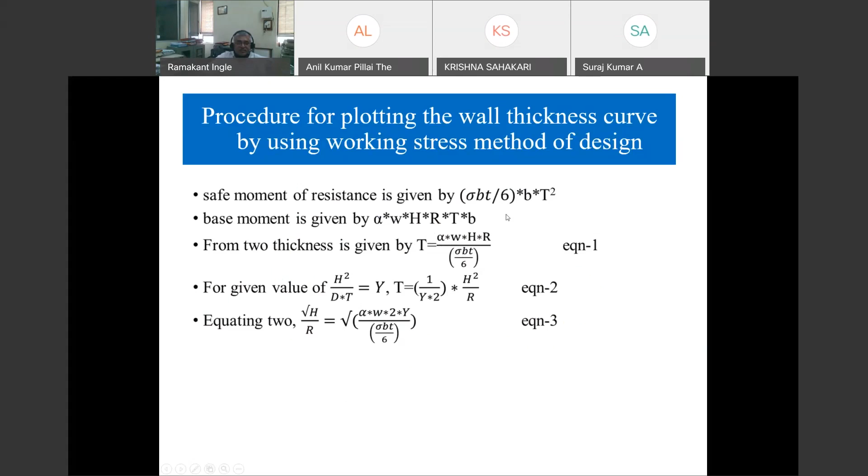This table is for the working stress method, because that's what I'm using here. The same thing can be done for the limit state method also. You can see this is moment, and this is hoop tension—we can do the same thing and try to get a similar table.

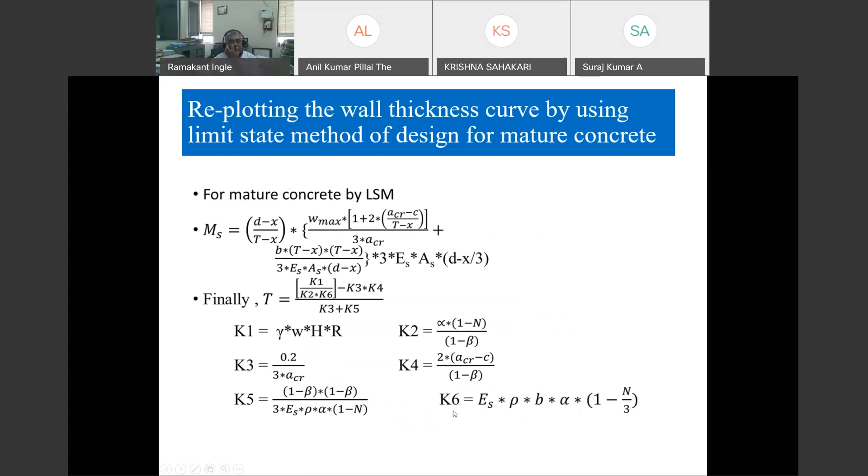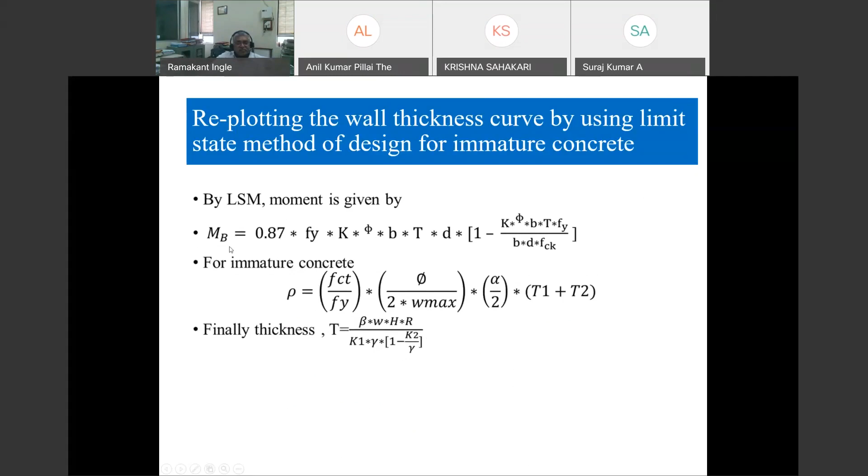So we don't have to keep on doing repetitions. This can be prepared by anyone using small Excel sheets. We just have to keep in mind that thickness from the bending expression, as well as thickness from the hoop tension expression, should be equated with each other to get these design expressions.

This is my last slide now. Most of this work, as I've mentioned, was done by MTech students as well as PhD students, under this R&D project on development of standardized design procedure and type design for elevated service reservoirs.

In this project, we have the general theory, general expressions, and then we've prepared Excel sheets, design tables—some of which we've already explained to you—and design drawings, detailed drawings also.

I tried to prepare drawings for capacities from 20,000 liters to 1 lakh liter capacity, with a limitation of only 4 columns, and staging height ranging from 12 meter to 20 meter, with that limitation of only 4 columns. Detailed drawings are also prepared for soft soil as well as hard soil.

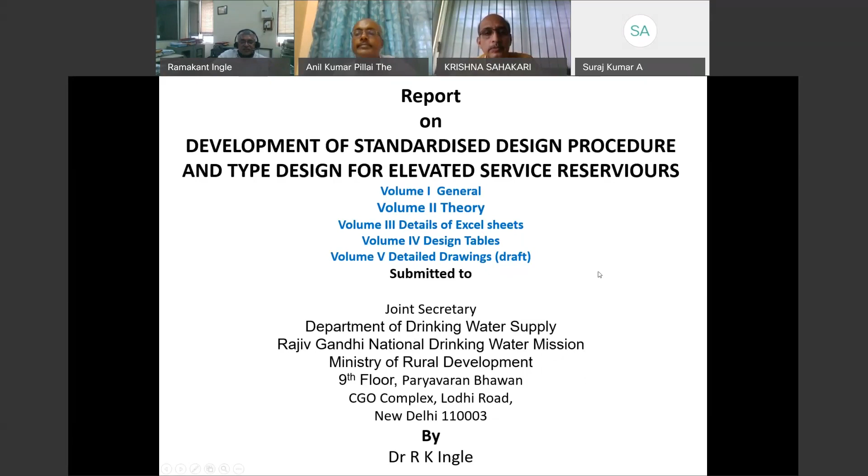Yes sir, some of the comments we can go through. Yeah, I'm just trying to. Engineer K.R. Garudujan has made a remark saying substitution of one dia bar with a certain spacing with different dia—oh, it has. Yes, just a minute sir, I will try to see. Achha, I could not see this, so I could not use a different pointer here.

Substitution of one dia bar with a certain spacing with a different dia bar with increased or decreased spacing is a very common phenomenon. As the presenter was mentioning, it is better to avoid this, because nowadays the designer has to design for crack width. Suppose the designer has designed 10 dia bars at 125 center to center for 0.2 mm crack width—if we provide a 12 dia bar at a higher spacing, definitely our crack width will increase, and so the designer's efforts are defeated.

Yes, if they use the same higher diameter but same spacing—but in that case, we are providing more steel, and that also may not be correct. There can be an audit objection, as well as crack width considerations. Another question is, sir—what is the difference between conventional shape and non-conventional shapes of water tank?